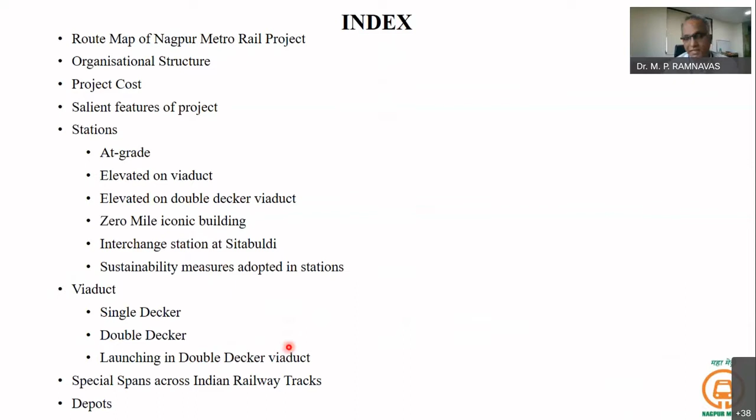I'll be talking on an overview of Nagpur Metro Rail Project, and I'll be taking you through the route map, the organizational structure which we are having, salient features, the stations, types, numbers, etc., the viaduct types, then launching of some of the special structures and the special spans across Indian railway tracks.

We can see our map. We are having two corridors, approximately 19 kilometers, north-south and east-west. In the north-south corridor, the southernmost portion is from Khapri to New Airport and Airport. At Khapri, New Airport, and one more station, Airport South, we are having an at-grade section, where the track is laid on the ground. Once we reach Wardha Road near the airport, we'll be going on an elevated viaduct, and thereafter it is completely elevated viaduct on the north-south corridor as well as on the east-west corridor.

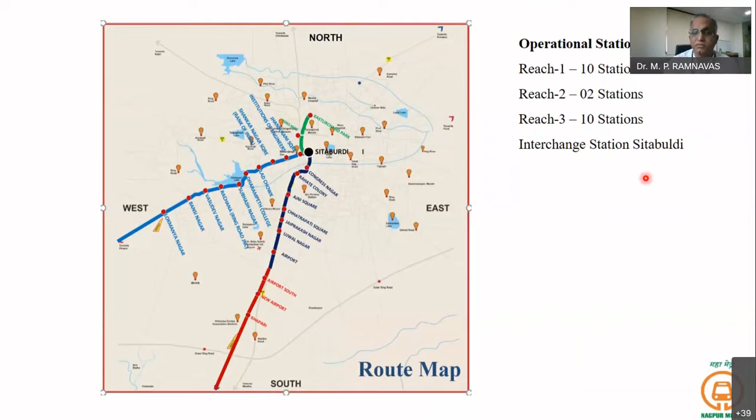Presently, as on date, we have 22 stations operational and about 25 kilometers running. We are running the trains, and we'll be getting approval from the Commissioner of Metro Rail Safety for 8 more stations in the coming days, for which the inspection is already over.

Our organization structure of Maha Metro, for the Nagpur Metro Rail Project, we are having a managing director, then our director projects, who is in charge of all civil engineering matters, director rolling stock and operations, who is mostly in charge of systems and rolling stock, and director finance. Under director projects, we have different units: planning, design, procurement, and various reaches of site execution - reach 1, reach 2, reach 3 - and there is an exclusive unit for the track. I'm looking after the design portfolio.

For the project organization, we have appointed one general consultant, which is a consortium of Systra, AECOM, Egis Rail, and RITES. We have appointed detailed design consultants like L&T Infrastructure, Enia Architects, Shirish Patel Associates, Tandem Consultants, STUP Consultants. Similarly, contractors are Nagarjuna Construction Company, Afcons Infrastructure, ITD Cementation - various contractors are working for our project.

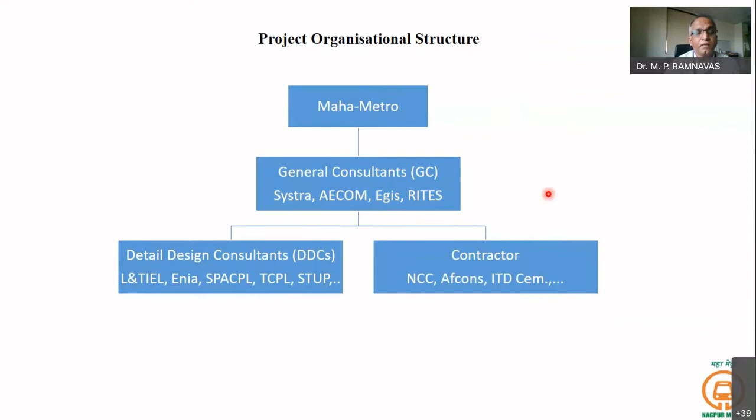Overall cost of the project is 8,680 crores. Viaduct will be around 40-45 crore per kilometer. Stations also range around an average of 40-45 crores per station. Double-decker stations will be 50-60 crores, and the double-decker viaduct portion will be around 85-90 crore cost, which I'll be detailing further. That is double-decker - we are having a national highway also carried on the metro pillars.

Salient features of the project: we are having, as I already explained on the map, 20 kilometers and 17 stations plus one interchange station on the north-south corridor. The interchange station has two sets of platforms, one for the north-south corridor and one for the east-west corridor. So exclusively on the east-west corridor, we have another 19 stations plus this interchange station. Then at Sitabuldi interchange station, we have a place, a busy junction called Munje Chowk, where we have a special Vierendeel type structure.

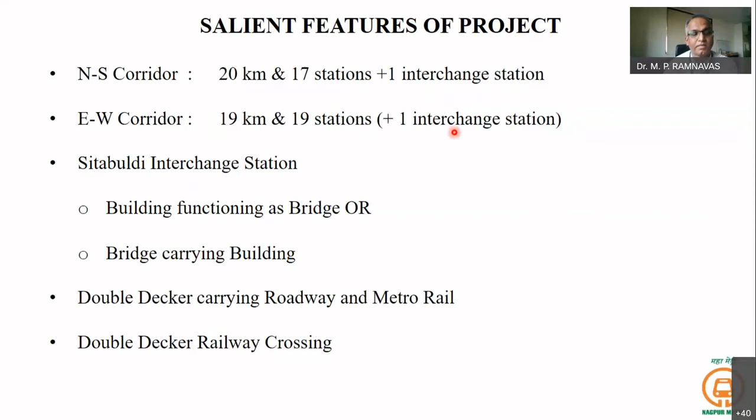So it is something like a building that itself is functioning as a bridge between the viaduct ends, or it can be a bridge where the building is also carried on it. And we are having a double-decker structure carrying highway and metro rail. There is also one double-decker which is crossing the Indian Railway tracks at one location called Gaddi Godam.

Station architecture is generally based on three themes, the three T's: tiger, teak, and tribes, and also aqua bodies. Modern interior finishes are used, and in some places artwork depicting the history of the region is also considered in the architectural design, along with differently-abled friendly design for barrier-free movement, with ramps, tactiles, etc.

For security, environmental design principles are used to reduce dead ends, corners, and dark areas in the station design. Biodigesters are provided for eco-friendly disposal of human waste, and solar panels are provided on the station roof to tap natural renewable energy. We also have rainwater harvesting, and we are aiming for and getting IGBC MRTS platinum rating for all the stations.

The main components of the station, considering an elevated station, include an entry exit structure where people can enter into the metro station. Thereafter, there will be a concourse where passengers enter through the paid area, crossing the automatic fare collection gates. This concourse is ideally kept below the platforms, and from the concourse to the platform we have lifts, staircases, and escalators.

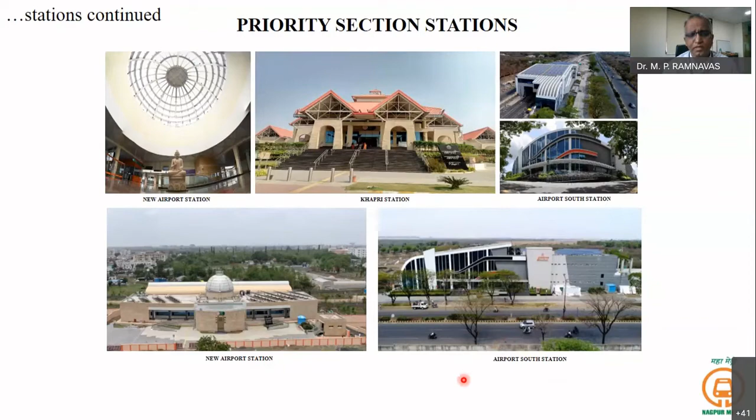There are many other stations in reach one, the southern quadrant or southern arm of the project. We have a station near the international airport, and Ajni Square, Jayaprakash Nagar, Rahate Colony, each one having a different type of architecture.

Coming to one station called Congress Nagar, at the road level plan, we have the entry exit structure on the left hand side of the alignment as well as the right hand side, with the main station box coming here. Ideally we should have got land for the entry exit structure just opposite to the station box at these locations, but that rarely happens. So wherever we get the land - in this case from Indian Railways, since there is an Ajni railway station nearby - we use it, giving us connectivity also to the Indian Railways Ajni railway station. This metro station is named Congress Nagar station.

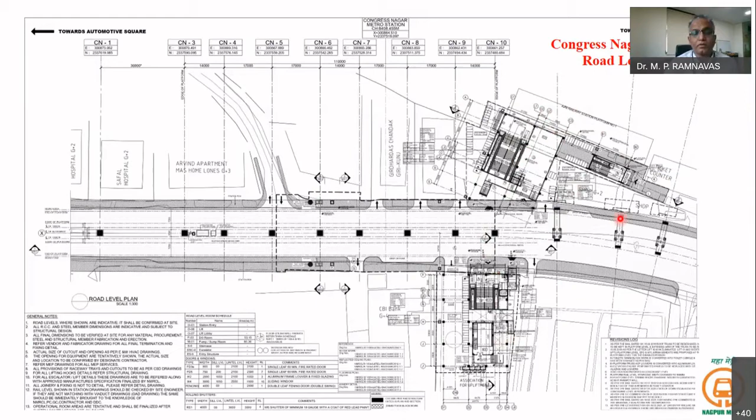From the entry exit structure, we reach the concourse level, with both entry exit structures reaching here. There will be a concourse unpaid area, then the AFC gates, and passing through that one reaches the concourse paid area. From that paid area, through escalators, stairs, and lifts, one goes to the platform - this is one side platform, this is the other side platform. This is the general layout of a station.

For architecture as well as structural requirement reasons, we have different types of roof structures, usually made of steel in most stations. This is the airport station, where we have a concourse at this level. In this particular station, the concourse is independent of the viaduct pier - the viaduct over which the trains run, with its own viaduct piers.

In this case, the concourse is supported on two rows of piers on the edges of the road, and the roof is supported basically on that, with an intermediate support on the platform, which ultimately transfers the load through the pier arm to the pier. But the main load supporting member is the concourse.

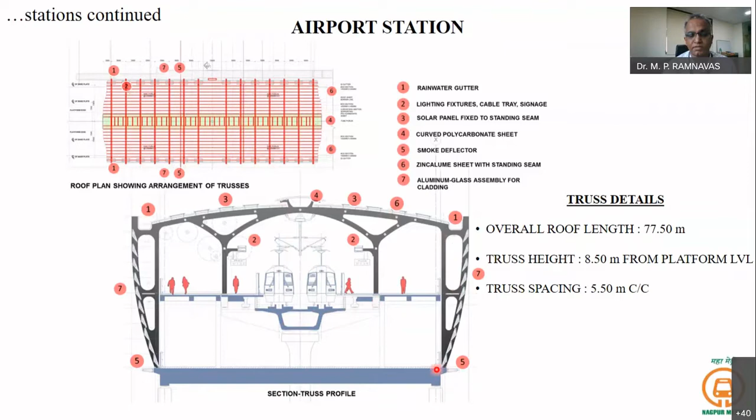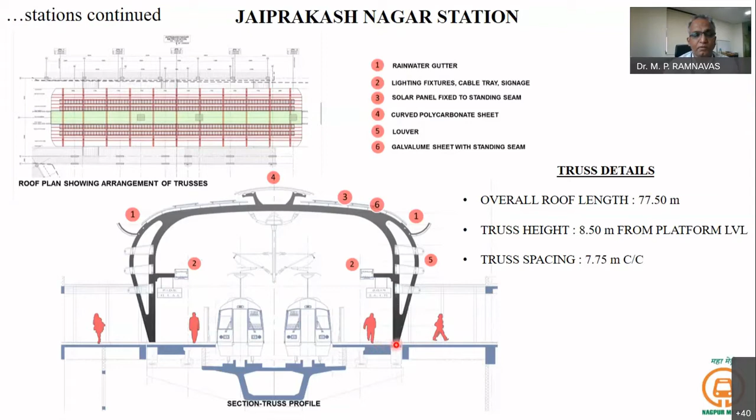The speciality of this type of arrangement is that even when the station work is not completed, if the land is not available for taking up the construction - which usually happens in urban infrastructure, since land is not available when we need it - sometimes we get delayed possession of the land. In that case, we can complete the viaduct along the metro alignment and the platforms as well as the station roof, and commission the track without commissioning the station. So there won't be any hindrance to the train operation even when that particular station is not commissioned, and we can complete the construction of that station at a later date and give entry to the platform without any hindrance to the metro train running.

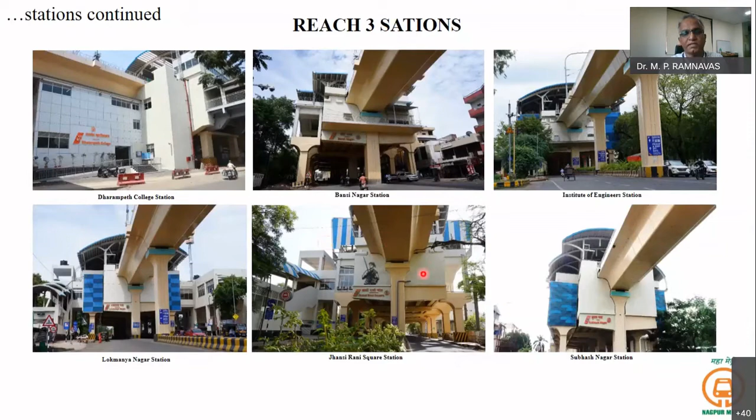This is another station where a different type of roof arrangement is there, similar to the one which we have seen at the airport, where it is supported on the concourse on corbels. And these are other stations in Reach 3, where the theme is aqua, maybe the architecture type we can say is contemporary. There are different types of roofs.

And this is one iconic station at Zero Mile. I think all civil engineers must be knowing this. Zero Mile is the point where the Great Trigonometrical Survey, when they started surveying the country, marked the zero at a location at Nagpur. This station is very near to that point, so it is named Zero Mile. Later it was renamed Zero Mile Freedom Park as per the 75th year of independence, and a small park is also constructed very near to that, which we will be seeing in subsequent slides.

At the Zero Mile station, we have a total of 20 stories. We have 2 basements for parking, then a ground floor, a mezzanine floor, and a concourse for passengers to come into the station. Thereafter, at the G+3 level, we have the railway line, where the viaduct will be coming from this side and from this side. After that, we have a concrete roof and one more floor for a technical room that we haven't constructed yet. We have constructed up to this roof only so far, and the upward 14 floors have been kept for future expansion, for property development, which usually will be given on a PPP basis - public-private partnership.

So this has got some opening here inside the building, and there is a vierendeel girder coming here also.

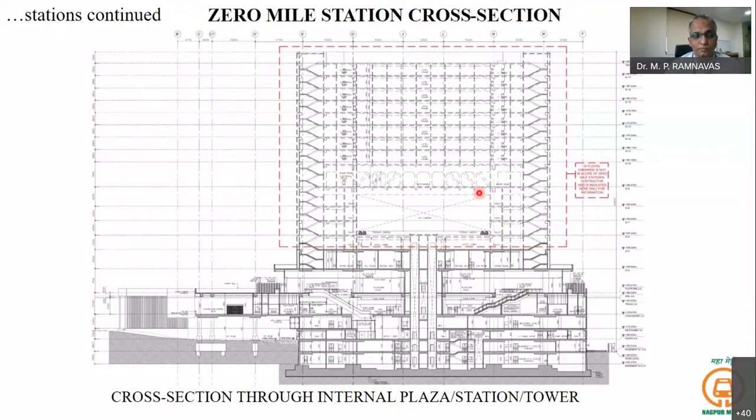For this building, which is proposed to house hotel rooms in the upper floors, lesser vibration levels are needed. The vibration decibels permitted for hotel rooms is 72 VdB. So we conducted a vibration analysis for this structure, and we found that it is more than 85. So we have to bring it down.

For bringing it down, there are many options - different types of rail fixtures, or instead of spring, a rubber pad can also be installed. There are various means, and this is one of the most efficient things which will bring down the vibration VdB level by about 14. So we have introduced this.

That is, a floating track supported on springs. This is the structural slab we are having. On the structural slab, this slab will be cast with a spring inbuilt - a space will be provided for the spring, and the spring will be connected later on to that. This floating slab will be literally floating on these springs, and the track will be laid on that. So naturally there will be a little more deflection than the normal track, so we have done all this analysis to ensure that it is within limit.

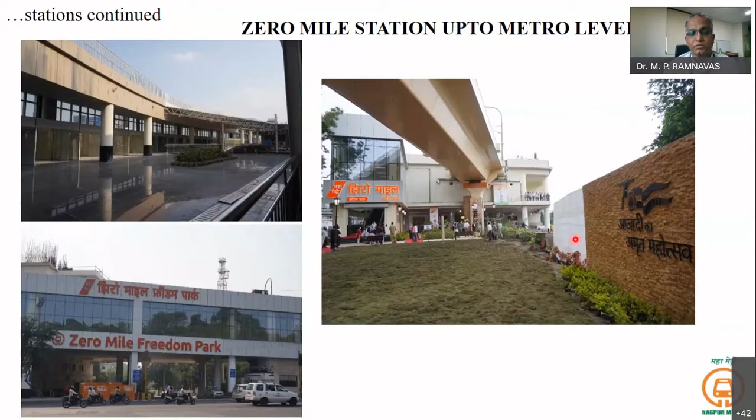About 40 meters by 21 meters, we are having 4 corners supporting the Vierendeel structure. This is the street level. Then the upper level, that is the concourse level for the north-south platform. Over that, on the Vierendeel girder, we are having the track.

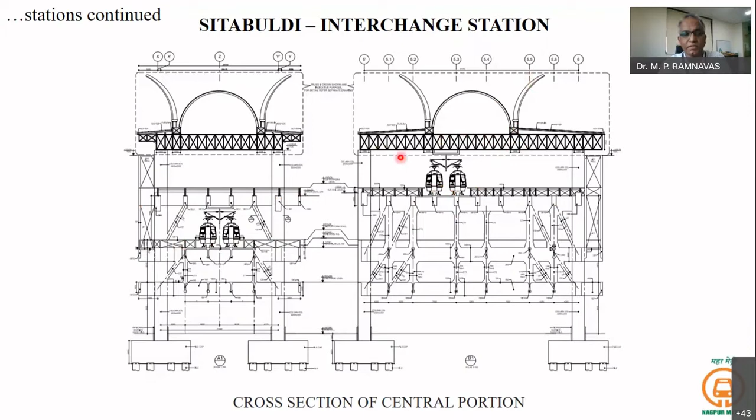Then again, the Vierendeel structure is going up and closed at this level. At that level, on the east-west side, we are having the track for the east-west corridor. Over that, we have provided a steel roof, with some ornamental finishes also proposed, which is yet to be taken up. But with the roof and all other facilities, the station is commissioned.

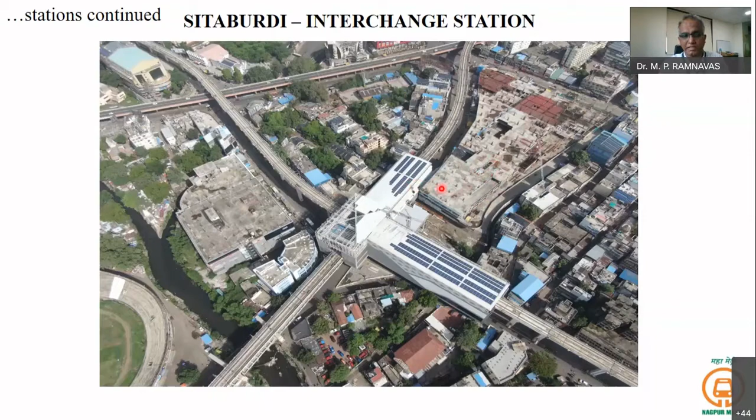And here a mall is coming up, a private mall, and we are giving connectivity to the mall. So passengers can exit directly from the stations towards the mall, or mall customers, after their shopping, can come into the station through access facilities which we'll be providing at the interface.

We have adopted sustainability measures in the stations like rainwater harvesting, biodigesters, etc. So even for the station building, as well as from the viaduct, we are collecting the rainwater, and that will be taken through pipes, through the piers, to the rainwater harvesting pits. That way we are recharging the groundwater.

And we are having biodigesters, a technology patented by the Defence Research and Development Establishment under DRDO. It has the advantage of no energy requirement and zero sludge generation. It uses anaerobic bacteria, an anaerobic microbial inoculum, which is the name of the bacteria used. Once it is charged, it will keep on working without any hindrance.

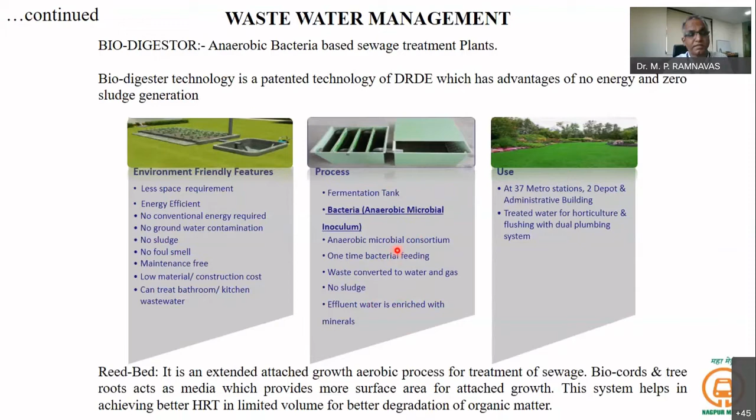We are having the biodigester tank, and after the treatment, it will come onto a reed bed, where the roots will be present. This will further improve the quality of the water. Then filtration through a rapid sand filter, and disinfection is also done. Thereafter, it will connect to the collection sump, and be reused again for flushing toilets or for horticulture wherever we are having landscaping.

So we are having a dual plumbing system in our station buildings, to reuse the treated water as well as for fresh water supply.

And this is the installed facility of the biodigester tank. This is an FRP tank, 5 kiloliter or 10 kiloliter, like that.

The FRP tank is embedded in the ground, and the water, after treatment, comes to the reed bed. There is some plantation here and below, with diffuser pipes inside, and that water will come out and be taken to the rapid sand filter and further disinfection, etc., for storage.

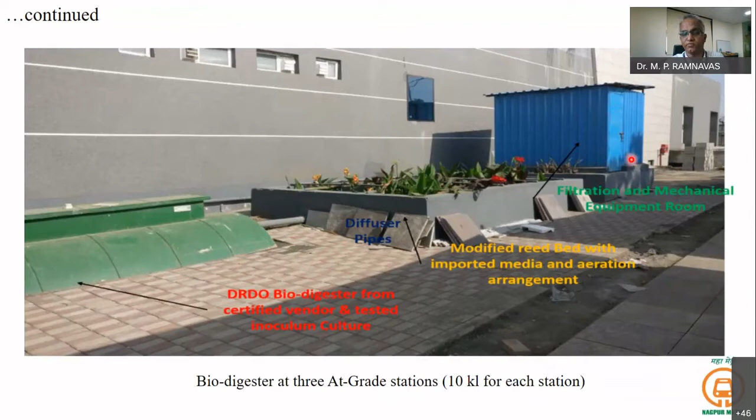This is the FRP tank, which is about 2 meters in diameter and 3.5 meters in length. This one is for 5 kiloliters, and for the other 10 kiloliter tank, the size will increase, with a lot of baffle walls inside to increase the flow time.

So again, a schematic diagram for that. Clear water will be coming from the underground water tank. It will go up and come for urinals, etc. And the sewage will be coming to the biodigester. After final treatment, it will go back to this treated effluent tank.

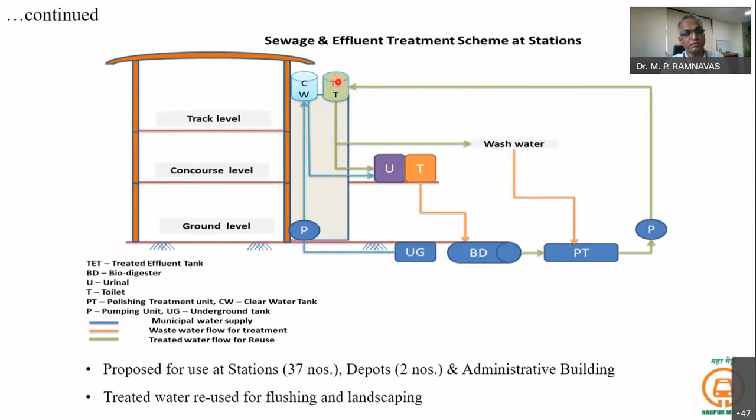And construction waste management also, we are taking all care for that. Excess soil generated is reused for landscaping or backfilling. Garbage, recyclable waste, biodegradable waste, and hazardous waste, it is divided and accordingly disposed with the scrap vendors, according to the type of waste which we are having.

And the sewage generated, even in our depots, all buildings, even our administrative Metro Bhavan building, we are having biodigesters installed for treatment of the sewage. And construction and demolition waste is stored in designated locations for further disposal. That is how it is being done.

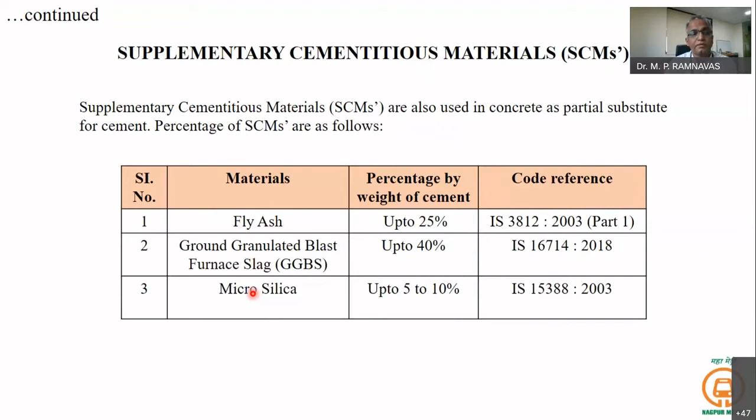Supplementary cementitious materials are used in concrete - fly ash, ground granulated blast furnace slag, or microsilica - according to the proportion. Generally for PSC structures, we are not using any of these things, to avoid lesser hardening of the concrete. And we are also tapping solar energy.

Our phase 1 project, which is now getting completed, the requirement will be 30 million units per year. So our aim is to have 2/3, that is 65% of the total energy, including traction requirement, to be met by solar - that is 20 million units - once we install 14 megawatt peak equivalent of solar panels. But due to some land issues, we are yet to reach that level, so it is in the intermediate stage now.

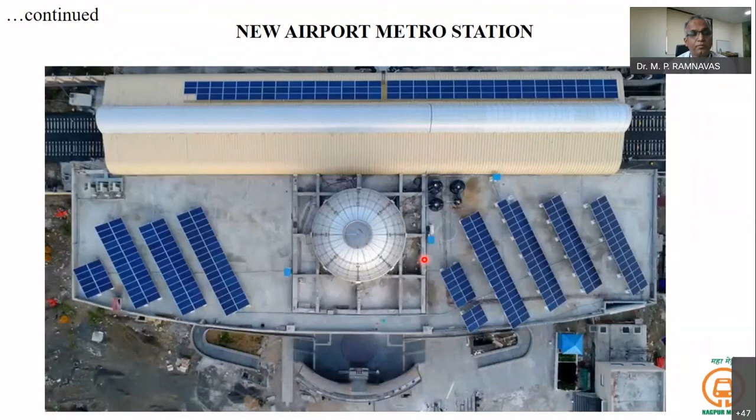Now solar panels we have installed on the airport metro station and airport south station, which we can see on the roof. New airport station, Khapri metro station, wherever the slope is compatible for solar panel installation, we have installed that.

And for the air pollution control in the construction phase, water sprinkling is being done. Dust collector in the hopper we are keeping by covering it with cloth. Then bag filter is used wherever cement is brought through the truck and is filled into the silo.

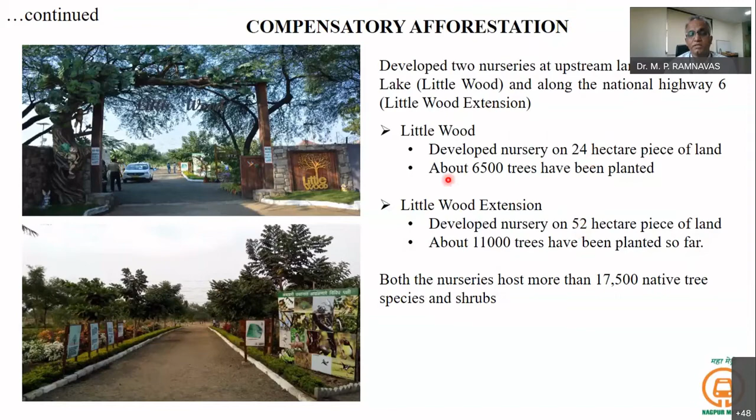And conveyor belt is also provided with cover at the batching plant location. Water sprinkling is done, physical barriers are provided wherever required. We are also doing afforestation for compensatory purpose. We have developed 2 areas - 24 hectare and 52 hectare pieces of land which we got - and 6,500 and 11,000 number of trees have already been planted so far.

Now coming to the viaduct, which is the backbone of the metro system. We generally adopt a PSC box type superstructure, except in obligatory locations where we are having steel I-girders as composite structure, or precast concrete I-girders, or any special railway crossing, where we have a different type of structure. And for the PSC box type, we are using precast segmental construction through launching girders - these are launched. We'll be seeing those things in the subsequent slides.

And we generally adopted 1,200 dia pile foundation. At some locations where shallower depth gives very good safe bearing capacity, we have gone for open foundations. Generally all piers are single column, except a few locations where it is portal. And we are having some double decker stretches - about 3.1 kilometers in reach one, that is the southern part of the project, and the northern part reach to Kamptee Road - about 5.5 kilometers of double decker carrying 4-lane NH at the bottom level and two-line metro rail at the top.

In the double decker stretches, below the platform we need to have a level where the concourse is provided for passengers to assemble and proceed to the respective platforms, or to assemble from the platform and decide which side they have to go off the road. In double decker stretches, this position where we are supposed to keep the concourse is already occupied by the national highway flyover. So we are having a split concourse on the roadside structure - the side structures, as we can say.

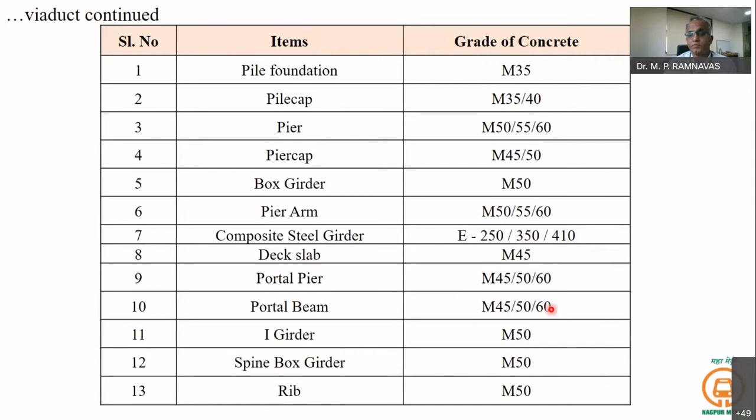The segmental box girder used generally in all other metro projects till recently is a box girder which is segmental. All these segments are cast, and then finally through the launching girder it is launched and stressed. After that, another precast element for the parapet is brought from the casting yard, and this is attached with the deck slab of the piers, this box girder, through stitch concreting on both sides. This is how it is generally done, starting from Delhi Metro and even Bangalore Metro or other metros.

So we have made some change in this. We have made our cross section with the deck slab and the box girder like this. And the parapet, instead of having a separate parapet, we have made the parapet a smaller one, integral with the box girder, cast integral with the box segments.

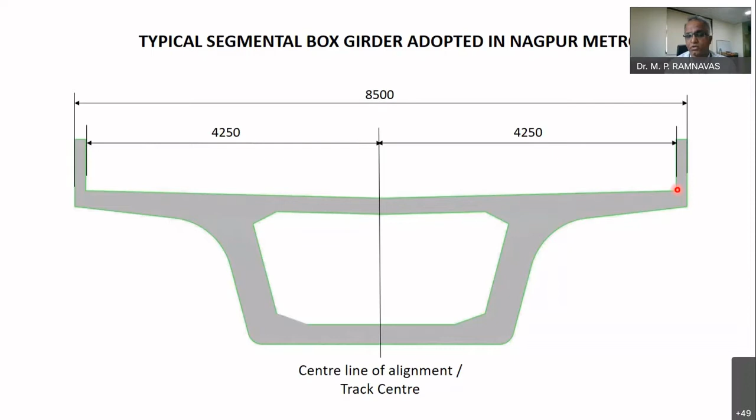So with that, the additional effort of casting a parapet and bringing it to site and launching it above the running roadway traffic is avoided, which has enhanced the safety aspects as well as the cost and time aspects. This was possible, and with this we could make the width of our viaduct 8.5 meters instead of 9.95 generally used with the other earlier conventional arrangement.

By integrating this, we have got reduced girder weight, superimposed dead load is also reduced, erection of precast is avoided, there is no stitching activity, resulting in reduction in time and cost of construction.

On dimensional aspects, generally for the conventional box girder arrangement, the inner distance between two tracks will be 4.15 to 4.25, and in the U girder it is still more. We have adopted 4.1. Then the height we have reduced to 0.7 meters compared to 1.2 elsewhere.

Another feature is in the operational aspect of the trains. In case of an emergency, when a train is required to be stopped in between and passengers need to be evacuated, what was generally followed earlier is side evacuation. The side doors of the train will open and people will come out of the train, and they need a walkway on the sides. Along the walkway, they will walk down to the nearest station. This is how it is being done generally.

But in our case, we are having front and rear evacuation. If a train is in any case held up between stations on a viaduct, then the front and rear doors will be open, and coach by coach people will be evacuated. They will come out at the end of the train or at the front of the train, and they will walk along the viaduct.

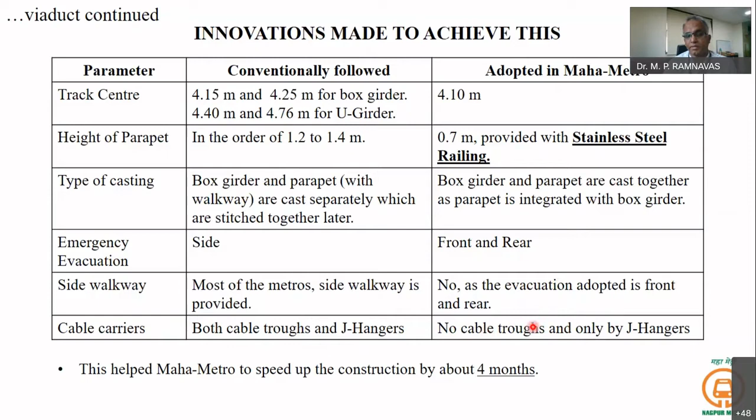We have also made it more compact by avoiding cable troughs and keeping all the cables on J hangers on the parapets. With that, for a typical 25-meter span, we could save some 30 cubic meters of concrete in the cross-sectional dimension of the superstructure, which ultimately reduces the dead weight.

It will also help in reducing the cost of the substructure and foundations. So overall cost reduction due to this compactness and integral parapet casting is estimated to save about 100 crores in the total project.

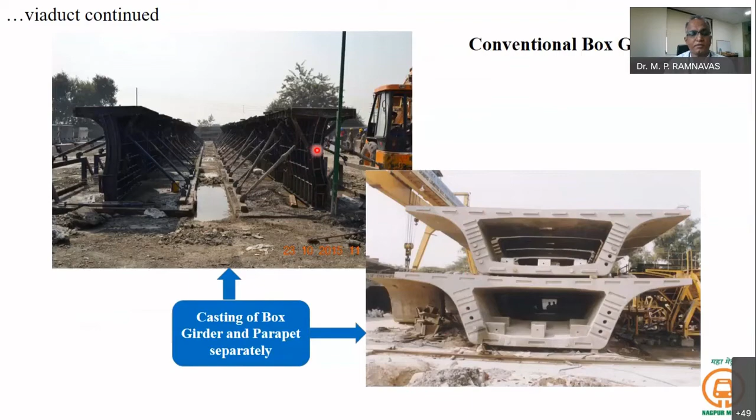This is how the conventional box girder segment with the deck slab is cast, and this is the parapet casting, including the shuttering only. I'm having a photograph — now it is not being used in our project. Whereas in our case, the box girder section is cast along with the parapet.

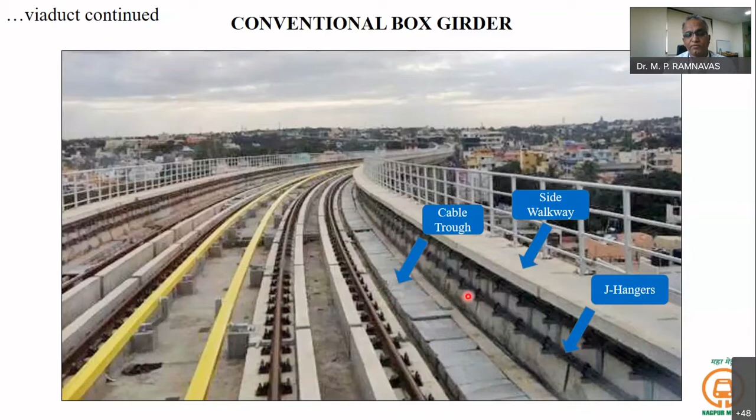What we have changed is this: cable trough is not provided, this parapet has no walkway required, and this J hangers we made in one more layer. So instead of cable trough, all the cables are carried on the J hangers at the sides of the parapet, which can be seen here.

We are having overhead traction, overhead portals for the traction. This is made of tubular construction, which is first of its kind in India. It is economical compared to the normal type of latticed portal or whatever we generally use on Indian Railways or elsewhere.

Here we don't have a side walkway, whereas with the parapet we are having stainless steel handrails, and here we are having all the cables taken on the side of the parapet.

Now coming to the geology and foundation aspect of the project, we are having 4 reaches. In reach 1, the southern part, we are having hard basaltic rock with depth varying from 15 to 25 meters, and at some places weathered rock at shallow depth. So we went for open foundation in very few locations, generally pile foundation with 750 ton capacity.

In the northern part, we are having highly weathered granitic gneiss along with schist, which is very poor kind of soil. So we cannot have end bearing; we have gone for friction piles with depth ranging from 20 to 30 meters, with capacity restricted to 650 ton.

In the western part, which we call reach 3, we are having basalt rock, so more open foundations are provided there, and at some locations we have gone for pile foundation also. In reach 4, we have reasonably shallow depth, maybe hard rock, so up to 750 ton we have gone with friction cum end bearing piles.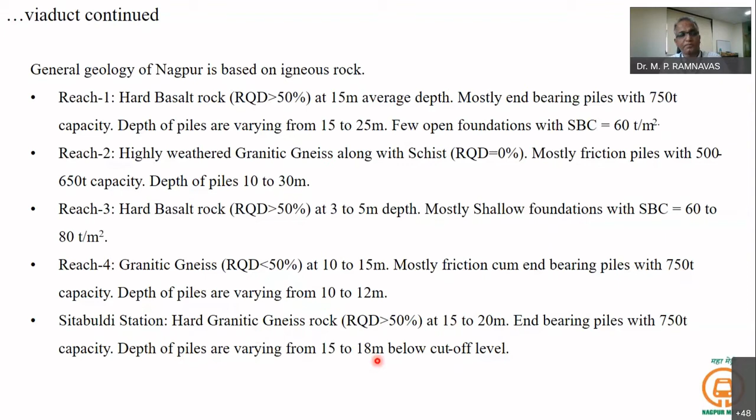Initial vertical load test is done with cantilever loading or with reaction anchors. Cantilever loading, especially when we want to do it on road, may need more time, and there is also some safety hazard. So reaction anchor type is more preferred nowadays.

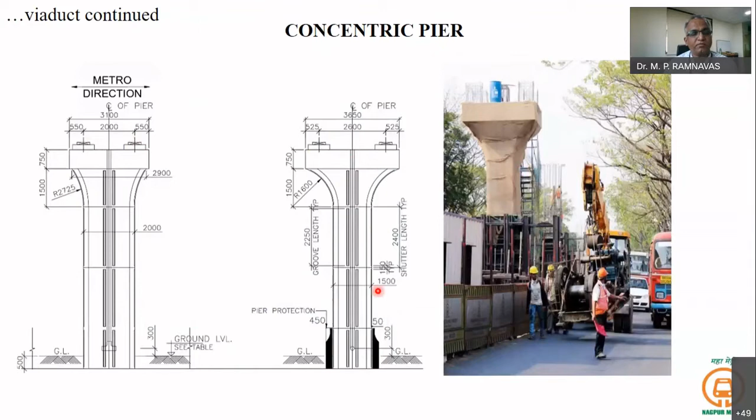Typical elevation of the concentric pier for the single decker level: we are having transverse spacing of the bearing as 2.6 meters and longitudinal spacing between bearings for 2 spans as 2 meters. This is approximately 1.5 by 2 meter pier size, cast in situ pier.

At very few locations we are having portals. This is near Airport South.

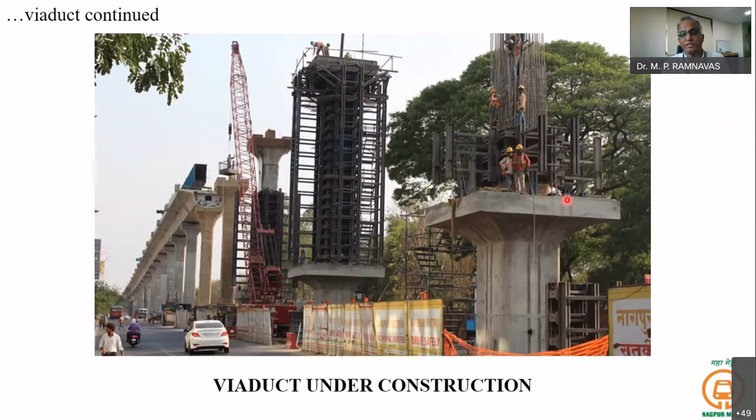And these are some of the under construction photographs from site. Here the single decker viaduct superstructure and the launching girder can be seen. And here we are having the ramp portion for the double decker portion. So these pier caps are for the NH level flyover, which we'll be seeing further, and the metro level will be at this height.

So for the launching of the superstructure, generally we use launching girder, which is little above 2 span length. The maximum span used so far is 37 meters, mostly restricted to 34 meters.

So this will have one front support, middle support, rear support, and rear trolley. These two spans are already erected, so this is a new span going to be erected. On the erected span, it is already auto-launched, spanning between two other piers where the girder is to be erected. The front support will be on the pier standing alone, the middle support will be on the pier where the superstructure is already erected, and there will be a rear support and a rear trolley.

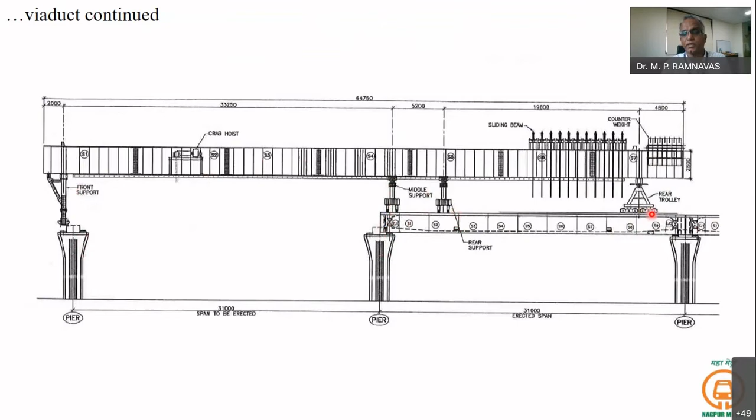These are the sliding beams which will be taken here, and it will be lifting the segments brought from the casting yard one by one, hanging them like this. Once all the segments have reached, they will be aligned properly. Then temporary pre-stressing will be done between each pair of two segments. Before that, epoxy will be smeared on the joints, and temporary pre-stressing will be done on top and bottom, so the epoxy gets squeezed and fills the entire contact area of the two segments, where we are having some shear keys also.

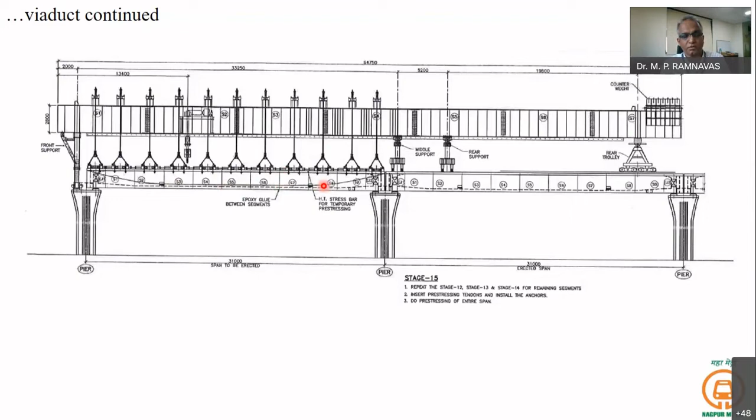All these segments are match cast at the casting yard, so as to have proper housing of the interfaces. After that, pre-stressing strands and cables will be threaded into the ducts left during casting, then stressed and grouted. The cycle requires about 5 days for one span on average.

As told earlier, in the southern part we have about 3.1 kilometers with 3 stations in the double-decker look, where a highway is also being carried on the metro piers, and here again 5.5 kilometers.

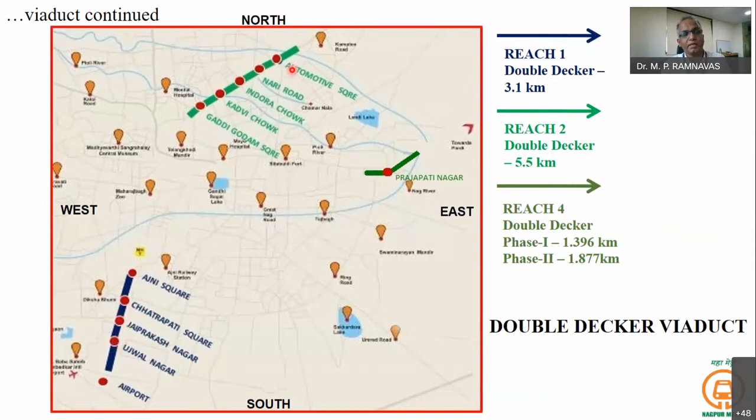The challenge of having two types of loading is that many load combinations must be considered in the design. For live load we consider IRC Class A, which is 4-lane loading, each with 2-lane up and down sections, and also 70R wheeled loading. Live load of metro is 16-ton loading, considering braking and tractive effort, metro rail LWR forces, and centrifugal forces wherever a curve is coming, with all combinations stipulated in IRC as well as IRS.

In this double-decker location, for reach one, we have restricted our pile capacity to 600 tons, and SBC maximum considered is 50. Even if it was more than 50, we considered only 50 to be on the conservative side.

For the superstructure, we have 3 locations where the NH flyover is carried on metro piers. In 2 locations metro is constructing for NH, and in 1 location NH is constructing the flyover. So our metro pier superstructure is the metro superstructure, and also the pier starting from the highway flyover level is constructed by metro. That comes in the reach 4 Prajapati area.

Wherever complete construction is done by us, the NH flyover is designed as a spine and rib arrangement. In that location, as told earlier, concourses will be there, considered as a split concourse on both sides and connected by a link bridge.

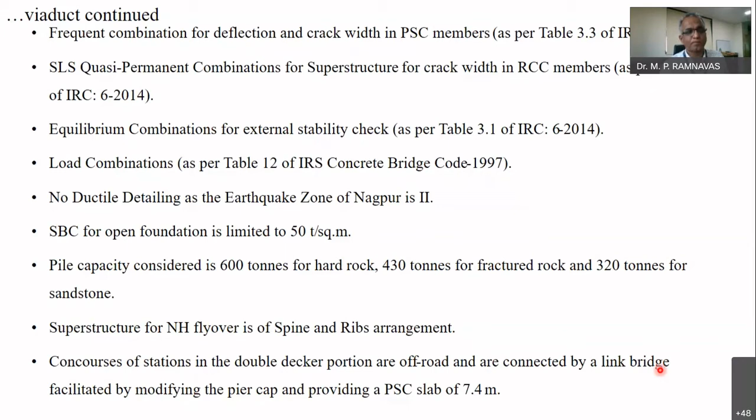This is a typical span of the double-decker flyover where the pier will be there, and the pier dimension reduces after the highway level further to the metro level. At highway level, we have the flyover with the spine about 6.25 meters top width.

The spine is precast, segmental construction, and the ribs are T sections, also precast, which are joined and stitched later and pre-stressed.

The dimensions of the pier from street level to highway level will be larger, then from highway level to metro level will be smaller, taking only the metro loading.

Since the height is more here, we have considered the UIC provision for track geometry also. The lateral deflections are limited and checked to have no impact on the railway alignment, as provided in UIC 776.3.

There is some problem, the Microsoft PowerPoint is not responding. Okay, it's moved now, I think. Yeah, it's okay now, I'll continue.

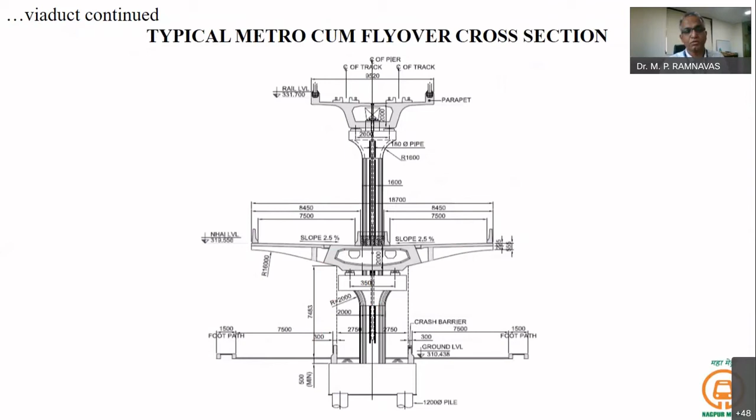By providing the spine and rib type of superstructure, we have more vertical clearance available here, so the road level is raised to the minimum.

In this case, which is followed by the construction taken up by National Highway in the eastern side, Prajapati, they have a pier arm, so the vertical clearance is to be maintained at 5.5 meters, and they have two independent box girders. The metro pier will start from this level going up, and metro box girders are installed by us.

This is another type of section used in the other part, which is not basically constructed by us except this portion.

This shows the cross-sectional dimension wherever we don't have a metro station. For the non-station portion, the bottom dimension is 2 by 2.5 meters and the top is 1.5 by 2 meters. Where the station is there, the station pier arm holds the platform, and in some cases the roof also.

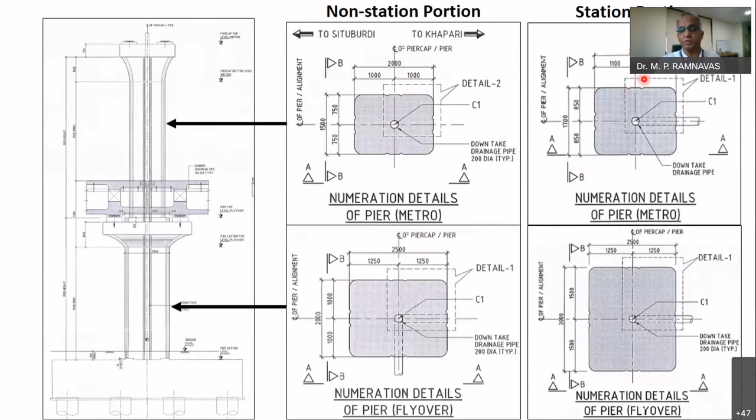In such a case, the pier column dimension is increased from 1.5 by 2 to 1.7 by 2.2, and the 2 by 2.5 dimension is increased to 3 by 2.5.

One complex thing in the double-decker type structure is that a station requires an interchange to be provided between the two parts of the station, which are on either edge of the road.

From the road level, this is the national highway flyover level pier cap where the spine will be kept. Then we have kept an extended pier arm and another component. These are all integrally cast but in different stages, along the direction of the metro alignment.

Then we will have this pier arm, and the top slab will be kept spanning across it, creating a tunnel-like space once completed, which is part of the link bridge. From one side of the station, we provide a link bridge up to this point, then go through, cutting across the metro box girder, to the other side. This is how the interchange happens.

It is not only complex for the design, but for the construction also. So in phase 2, if such a situation arises, we will try to avoid it. It's not that easy, but this is how it is done.

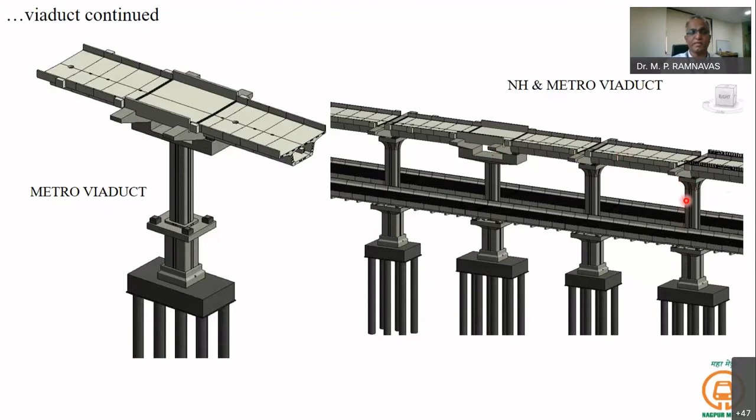This is a typical station pier arm, not an interchange location. This is again a typical spine and rib, with the precast cantilever arm acting as a rib. This is the spine cross section, and here is the rib.

This is all separated. It is precast, brought to site, erected, and pre-stressed. After that, this will be joined here and here, and pre-stressing stitch concrete will be done from rib to spine and rib to rib, with another rib stitched as well. Thereafter, pre-stressing strands will be provided through this for the entire width, and it will be pre-stressed.

This is from when we started Reach 1, the southern side. From what we learned in Reach 1, we improved the stitch concreting - the precast itself provided a bottom shuttering kind of portion, so no further shuttering was required except a very small metallic strip, making the stitch concreting shuttering simpler.

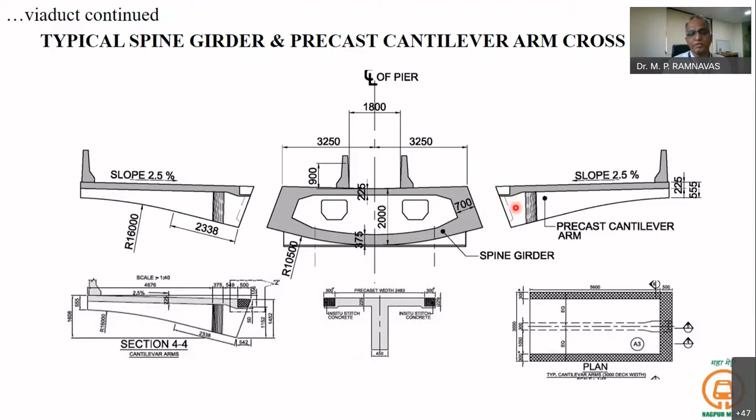This method was provided in the northern part, which was taken up later and is now almost nearing completion. This is how the erection methodology works for a 2-level or double-decker kind of superstructure viaduct.

Here, a separate launching girder is used, which will be auto-launched onto the span where it is to be launched. Through the truck, the spine segments will be brought and hung from the slider beams sliding on the launching girder. Then it will be aligned and stressed.

Once stressing and grouting is over, we will start erection of the metro level girder. For that, instead of taking it from below, since the presence of the spine girder will not permit that, it will be done like a front feeding.

The truck will be brought to the front of the span to be erected, and from there, tilting it 90 degrees - not in the alignment where it is to be erected - it will be brought up. The front leg has 2 legs, and between the legs there is space for this segment, of 3 meter maximum length, to go across.

So it will come through the space between the two legs of the front support, and it will come here and be aligned like this. After all the segments are aligned properly, it will be pre-stressed and grouted. That is how it is completed.

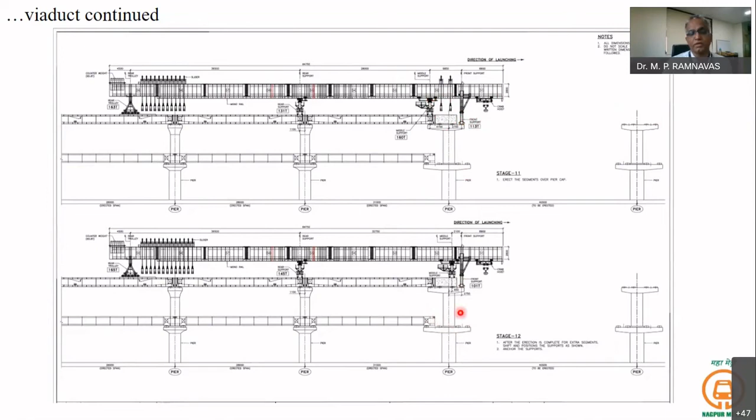In the case of double-decker 2-level superstructure launching, it takes usually an average of 9 days. And this is how the double-decker launching was going on.

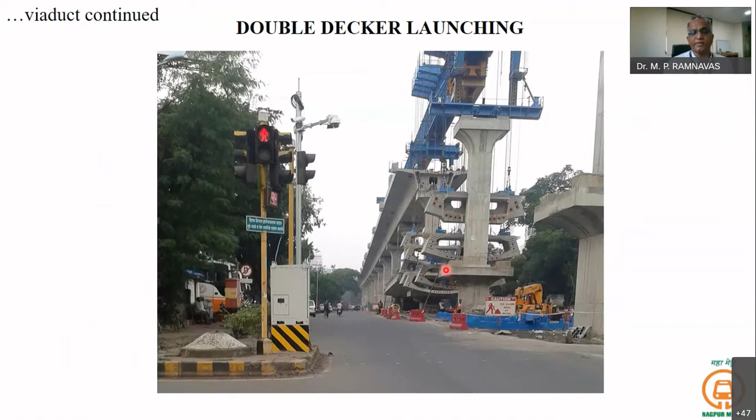The spine segments for the NH level was being lifted up. It was being lifted up here. It is kept hanging.

After that is completed, the metro level segments are being lifted, and it will be kept here, and further it will be stressed. Then the launching girder will move out to the next span, and again spine, NH flyover level and spine, and then metro level box. And this is some photographs showing these activities.

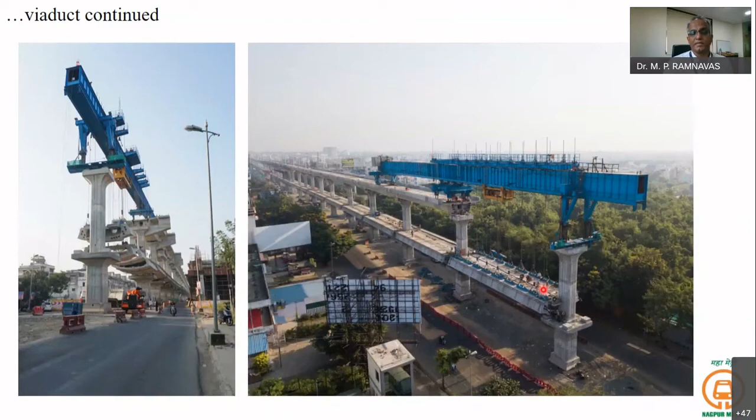This is one spine completed at the NH level. The metro level is going to be taken up. Here, this is the station portion where the double-decker alignment is there.

So we are having the NH level spine here. Ribs are yet to be attached to that. And these are the station piers. At the central pier, we are having the link bridge.

For that, the provision is being made with an extended pier cap and some arrangement for the pier arms. And this pedestal kind of thing on the pier arm is for supporting the platform, for making up the height between rail level and platform.

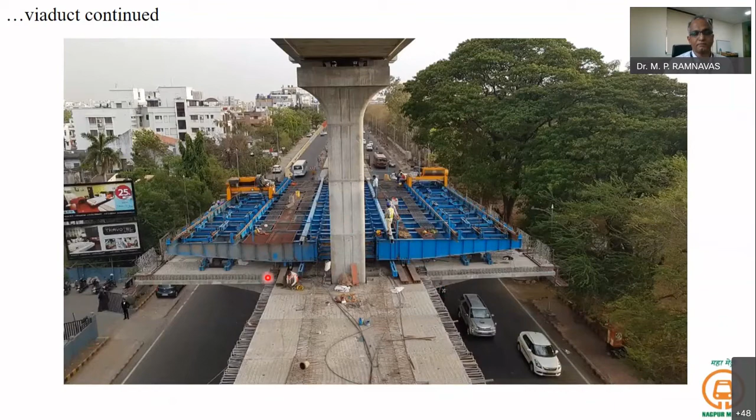And this is how the ribs are being installed. That steel formwork, steel structural assembly will be kept here, and below that each rib will be lifted up, and that will be kept here, and stitch concreting will be done. After that, stressing will be done.

And this is the shuttering required for stitch concreting between two. This is the gap available, and this is the shuttering kept. In this kind of design, we need a very small strip of steel shuttering with this arrangement.

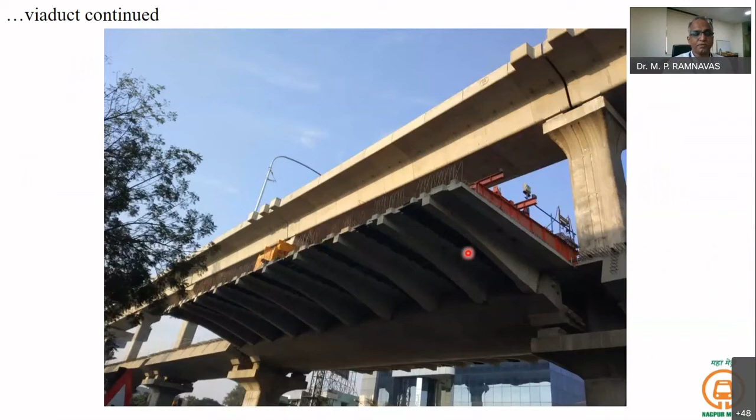This is after erecting the ribs onto the spine, slightly dark in the picture. Other spans it was not completed. This is the final bottom of the spine here and the ribs. This kind of superstructure is available on Mumbai International Airport much earlier.

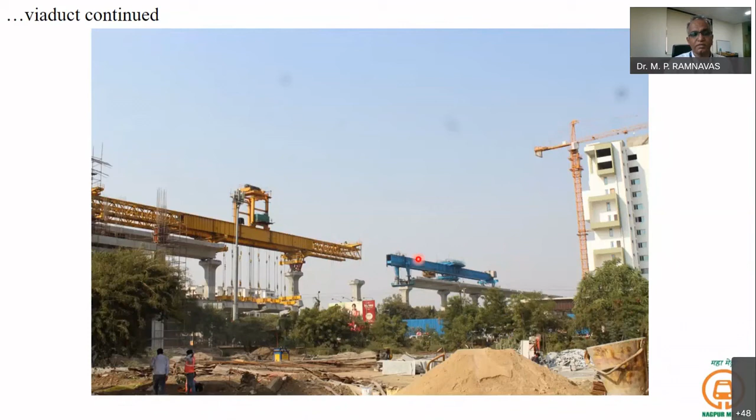And this is again that 2-level launching being done. And to speed up the work, we generally have launching at 2-3 locations with the help of 2-3 launching girders working. So it is coming to a closure here.

This is again Chhatrapati, Jaiprakash Nagar station, where the station can be seen. At metro level, the train is running, and this is the highway level.

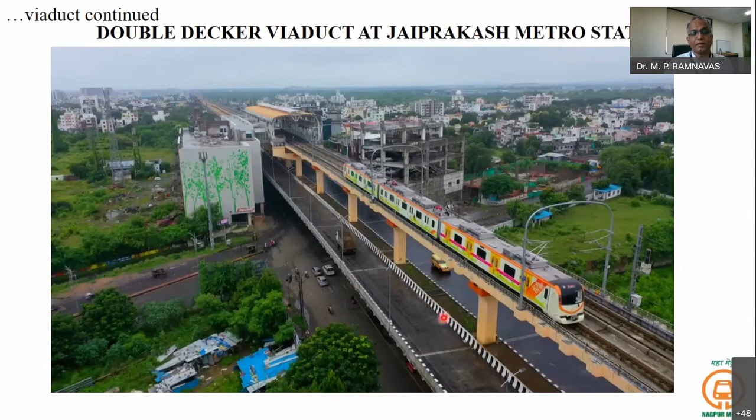Now we are having a few special spans. One is across the railway tracks, basically, where we don't have much control on organizing the pier locations or adjusting the spans. So in this location called Anand Talkies, we are having 5 existing Indian railway tracks, and they have a proposal for 3 more tracks, 2 on one side and 1 more other. So totally we have to give space for 8 tracks, and our alignment is crossing at a skew angle of 52 degrees. The actual crossing, if it had been square, would have been 45 or 50 meters, but because of the larger skew angle, the length of the span required for crossing is close to 100 meters. Finally, we restricted to 97 meters.

So in that location, we are having an integral bridge constructed using the balanced cantilever construction methodology, with a span configuration of 72 plus 97 plus 62.2 meters. The 62.2 span is slightly on a transition curve, with mild curvature also there.

We are having another location where at present we have 2 Indian railway tracks, and they have a proposal for 4 more tracks. So totally 6 tracks we have to accommodate. For that, our crossing is at 18 degrees skew, and we were able to manage it with 80 meters. But there, another feature is that this 80 meter span is part of a double-decker stretch. We have to carry the 4-lane NH at one level, and at the upper level we carry the 2-lane metro tracks.

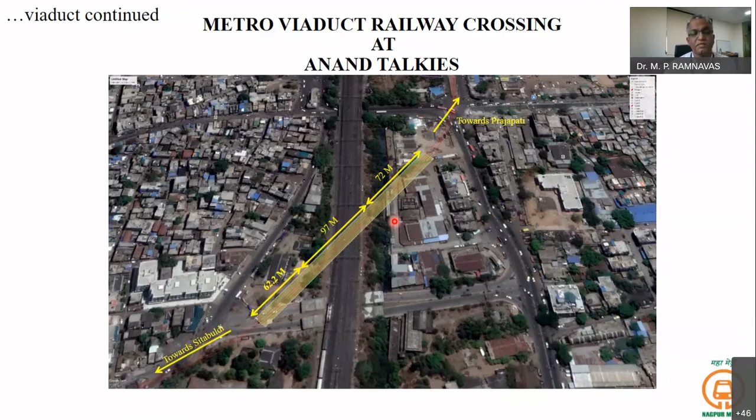Initially we proposed a steel truss also here, but there was no space for fabricating and launching the steel truss. That ultimately made us decide on a concrete bridge with balanced cantilever construction. So this is the longitudinal section, that's 72 meters. This is one pier, then again 97 meters, then 62.2 meters.

And this is the plan. These are the existing 5 tracks in black and the 2 plus 1, 3 tracks in green. This is on a 52-degree skew angle, and this is a typical half portion of the structure. We'll be seeing some more drawings to show the sequence of casting of these things.

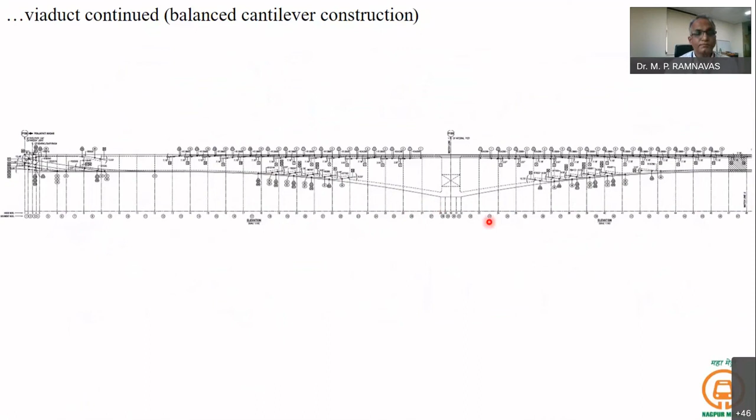Usually the balanced cantilever construction will be taken up starting from the pier. This is a totally 3-span integral bridge, so the middle 2 piers we start with a pier head of 16 meters, that is 8 plus 8. Then using a form traveler, at this railway location, we will cast another 3 meters here, another 3 meters there, which will be balanced. Similarly, on this pier also, 3 meters, 3 meters. Like that, both piers incrementally will be grown with concrete in 3 meter intervals.

So 8 meters plus then 39 meters on this side and 39 meters on the other, that is again 13 segments of 3 meters when we complete. These two will come closer to each other, leaving a gap of 3 meters, and with that 3 meter closing segment, we'll close the span. In between each stage, after each segment casting is over, we will wait for the concrete to harden for 5 days, then do the stressing, then grouting, and the form traveler will be moved to the next segment. So when the work is taken up, for the entire duration of the work, we request the railway, and the railway will impose a speed restriction for the entire duration of the work.

During the movement of the form traveler, that usually happens at midnight. We take a 1.5 hour traffic and power block from Indian Railways for the form traveler to be moved. During movement only, they insist on that block. Once the movement is over, during concreting, we don't take any block - even if a train runs at slower speed, there was no hazard since we had a very reliable system in place.

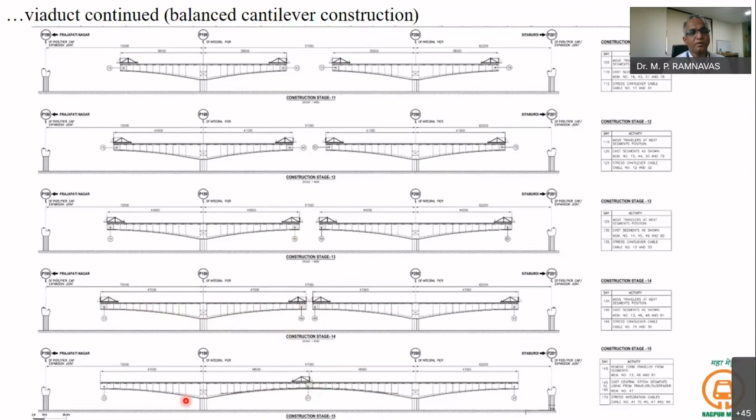Then both ends will have ground supported staging, this side and this side, and in-situ casting of the superstructure will be done here. The superstructure has a depth of 7.25 meters here and 3 meters here, and 3 meters here as well. After that, the final pre-stressing will be done according to the design stages.

This is the form traveler arrangement - this is the pier leg and this is the pier head. This is one form, one set, so half will be here and half will be here. The form traveler should be able to carry the weight of the wet concrete plus all constructional loads for a length of 3 meters and depth varying from 7.25 meters at the start to 3 meters at the end.

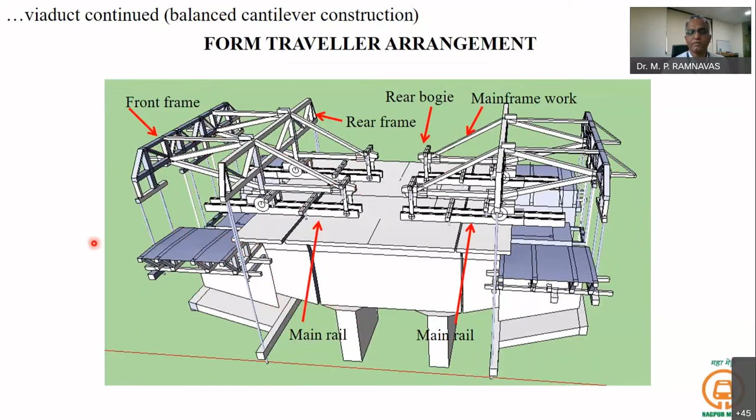This is the load testing - this is only a 3D view, but finally the load testing was also done on this bridge. We are awaiting the Commissioner of Metro Railway Safety sanction for operation of passenger traffic.

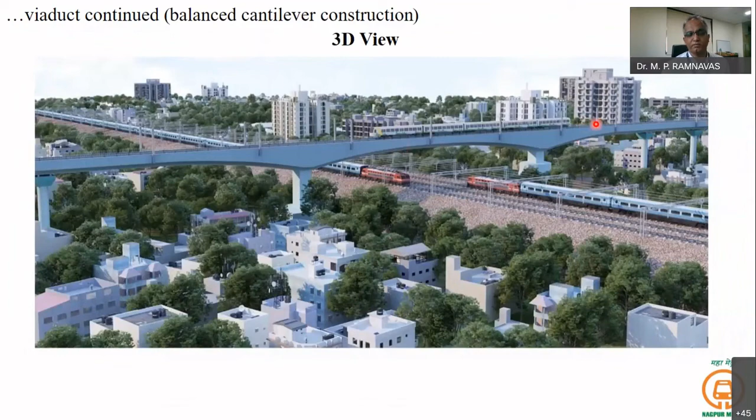This is another location called Gaddigodam, where we have a double-decker railway crossing, part of a 5.5 km long double-decker stretch with a 4-lane NH and 2-lane metro. Here, the NH is already going as a subway below the Indian Railway track.

The Indian Railway track earlier had a plate girder bridge. Later they changed it to a pre-stressed concrete slab, precast segments. So now that slab is available, and this is the plan.

There are two Indian Railway tracks, coming from the northern side towards the city. We have kept a span of 80 meters. We have many obligatory situations - here is a Gurudwara, and we cannot have the pier closer to that, encroaching into their land. Railway always wants the pier kept outside the railway boundary. So on this side we have gone a little away, and on this side railway allowed us to provide it inside the railway boundary.

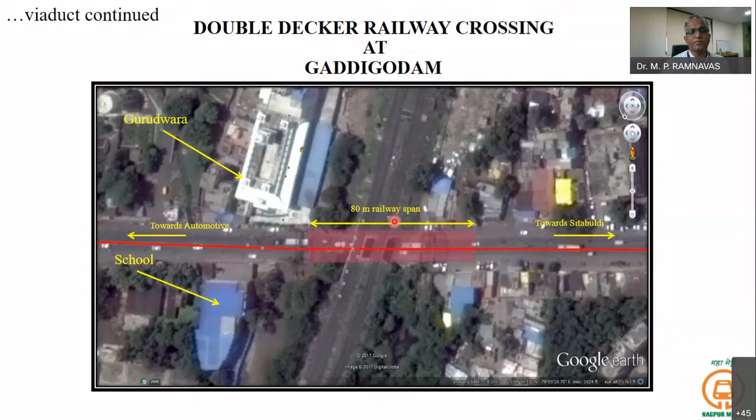At the top level, it was supposed to be a pre-stressed segmental box for the metro to continue, but due to construction sequencing, since this was taking time to complete, we are just completing it now. In a few days everything will be over, including the deck slab casting. So to speed up the work, we couldn't wait for the launching girder here to complete this work, so the launching girder had to be demobilized.

So we converted this span at metro level to steel-concrete composite with steel I-girders and concrete slab, similarly on the other side also. This is on an 18 degree skew with an 80 meter span. NH is at the lower chord level. Here we can see 2 existing tracks and 2+2, 4 proposed future tracks for Indian Railway.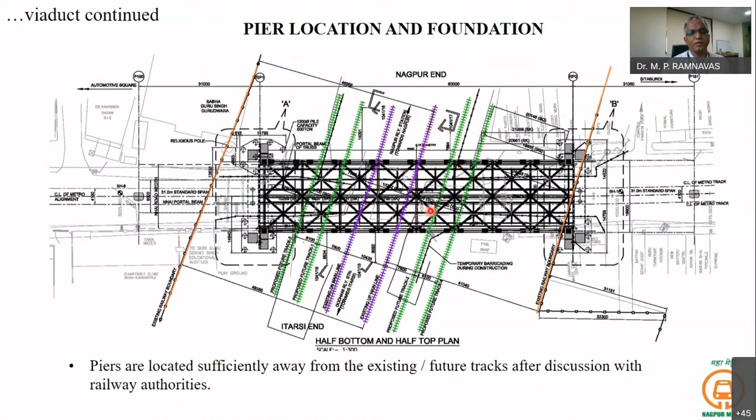This is the portal. This was done to meet some provisions which the railway had in 2017-18, when we were getting this general arrangement drawing approved. They wanted redundancy built into the structure in case an Indian Railway train gets derailed, so that this structure would not cause secondary failure of another bridge.

So in the case of Anand Talkies balance cantilever, we provided a fending wall, an RCC wall designed for whatever force was stipulated by railway, around the pier supporting the balance cantilever. Here in the portal, we introduced one more redundant leg, so that even if this gets crashed or fails, the portal will remain standing without it. That was the redundancy done.

But after one year of issuing that circular, the railway themselves kept it in abeyance, and it has not been followed now. But since our GAD was already approved like this, we are continuing with the same kind of work.

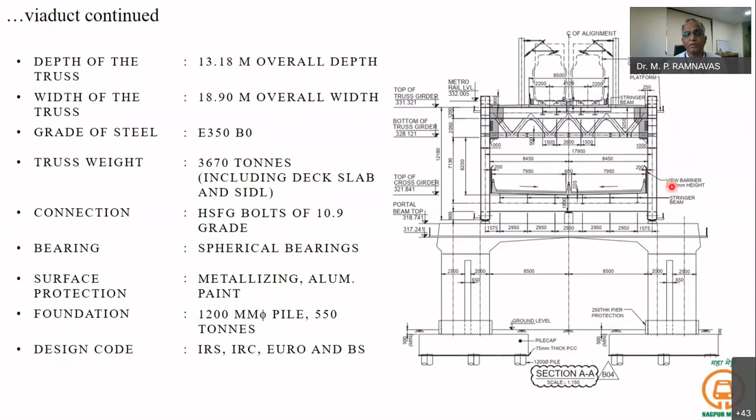The bearing arrangement provided has 4 supports at 4 corners, for this 80 meter span. At all 4 corners we provided vertical bearings, and a pin bearing was provided at one location to take the longitudinal forces, with a longitudinal guide provided on the other side.

At the construction stages, this will be the finished truss. This shows the construction stages after the truss erection, which I'll detail in the coming slides. After the truss is erected, the NH level slab will be done, and after that the metro level slab will be done. That is how the construction stage proceeds.

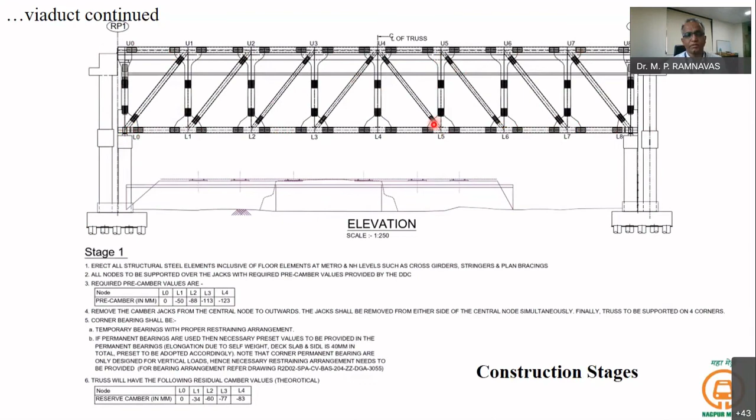Now the launching scheme across the Indian Railway track. Various schemes were studied over many years. Initially we thought of erecting the entire structure at the adjacent span, just before the particular span, needing 18.9 meter width with clearances in straight alignment, so it could be fabricated and erected there, then pushed through nose launching or other means. But the road alignment is not straight, and the nearby shops which we thought of demolishing and acquiring did not happen, so we had to devise another methodology.

Finally, the methodology adopted divided the total 80 meter span, which has 8 panels, into 3 parts. The launching scheme was devised with a lot of temporary supports made of steel tubular columns, and a bridging beam was given. These are the temporary supports.

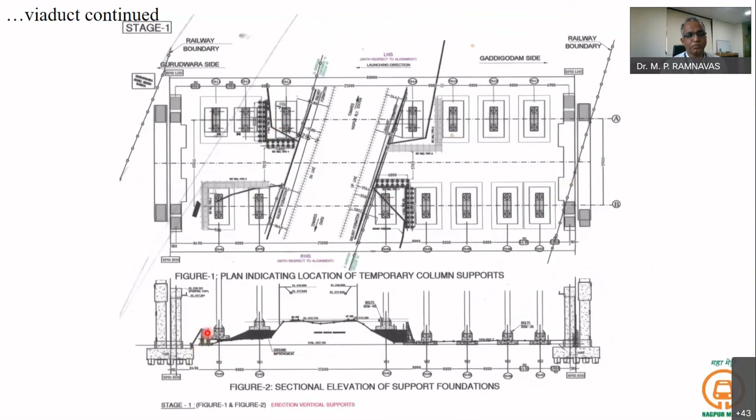That itself was a huge work. You can see the longitudinal section, temporary supports for that, with concreting and even piling, everything was done.

After it reached the proper level, we provided steel built-up girders on both approaches across the railway to be spanned. For that purpose, we took a traffic and power block from the railway, and through crane, those girders were installed and erected here, with planking here and here. It is actually skewed, so this was later made very stiff to avoid unequal deflections between the two lines of the same truss while moving. This was for bridging between the temporary piers on both sides of the Indian Railway track.

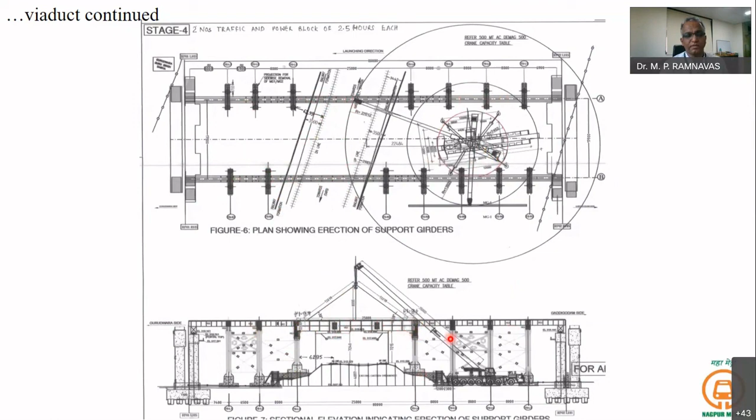So now this is made, and the top was given a proper surface finish.

After that, part 1 is erected on supports, which are placed on jacks to adjust the levels for proper fabrication and connection.

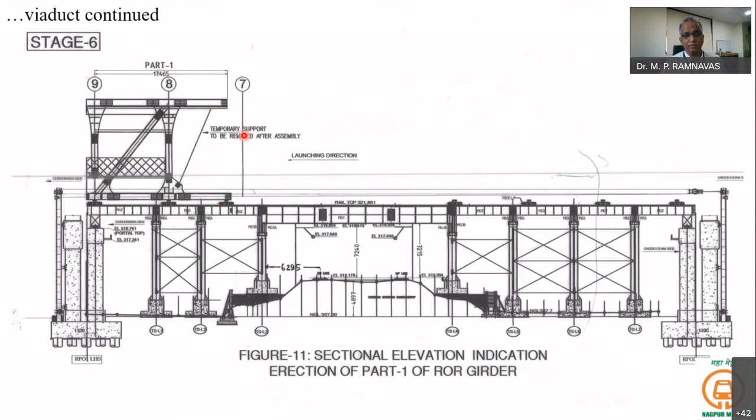After part 1, part 2, which was supposed to come here—if you see the node numbers, we have L1 to L9 for 8 panels. So nodes 7, 8, 9 were part 1, initially erected at the location where it is to be kept, but at a higher level.

This is because clearance is required for providing this temporary structure. So this was kept at 3.5 meters above the final position, which is yet to be lowered now.

After this was made, another 3-panel length, approximately 30 meters, was erected here: 30 meters length, 18.9 meters width, and 13 meters height.

So this is made here, and keeping it on Hillman rollers, through a pulling rope, this was pulled to this location, and later these were connected here.

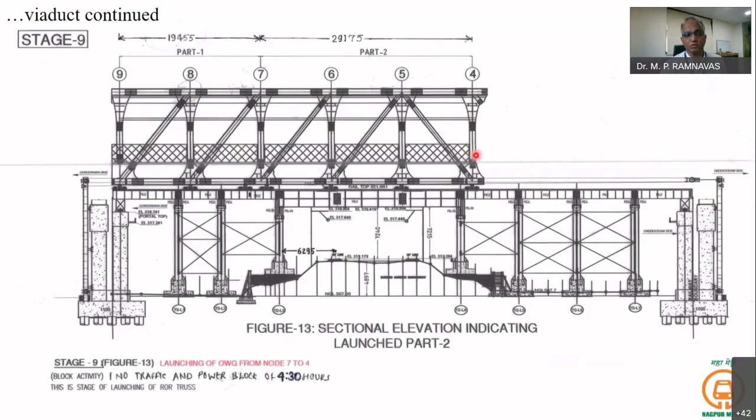So part 1 and part 2 were connected. After that, part 3, that is node numbers 1, 2, 3, connected to 4, member by member. So now this work is over.

After that, these girders are also removed—yesterday midnight, these girders were removed from the span through cranes. So now this girder is supported on four corners on temporary staging. It is to be lowered down now.

So totally 4 levels of the transport system—a 4-level transport system. Ultimately, this will become... our structure is catering to 2 levels of the transport system.

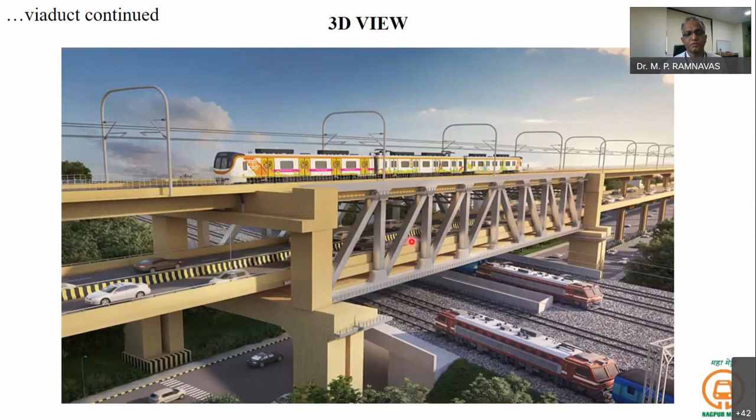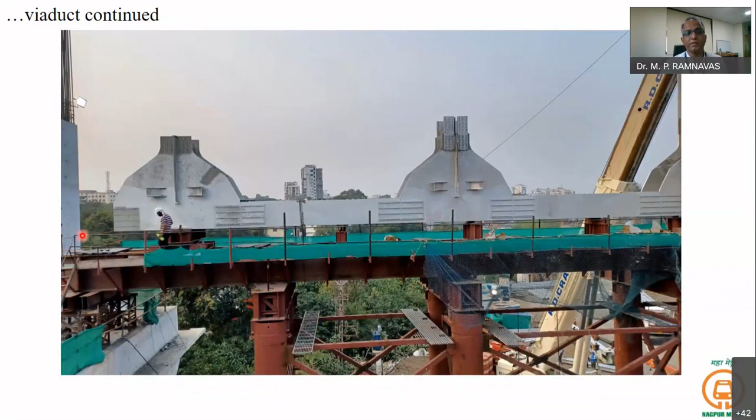After that, during deassembly, aluminum paint was applied, metallization, painting, etc. Then it was brought to the site, and there it was progressively erected. This is the lower chord, lower joint. This is how those things are, and this is the final truss, also completed.

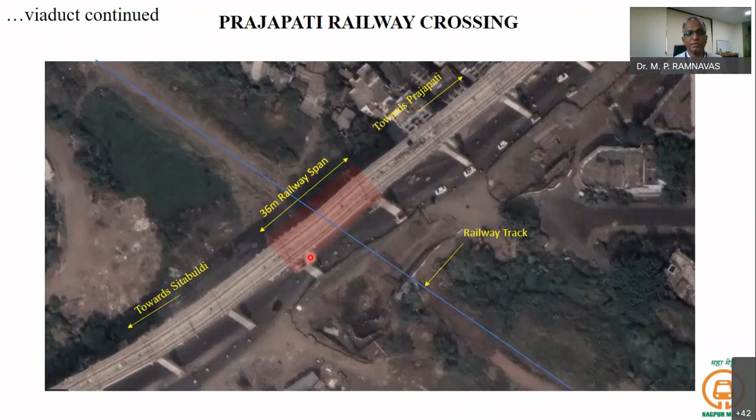Now we are having a Prajapati railway crossing—that is a simple structure with a 36-meter railway span. Railway track is there; we have 2 piers here connected with steel I-girders and a composite slab.

Here, due to the presence of utilities, we had to orient our foundation in a very unique way. This is available in almost all urban construction nowadays, because every time we dig, we get some surprise of having a utility which cannot be shifted. So we have to find an engineering solution for such situations. This is how the superstructure came out.

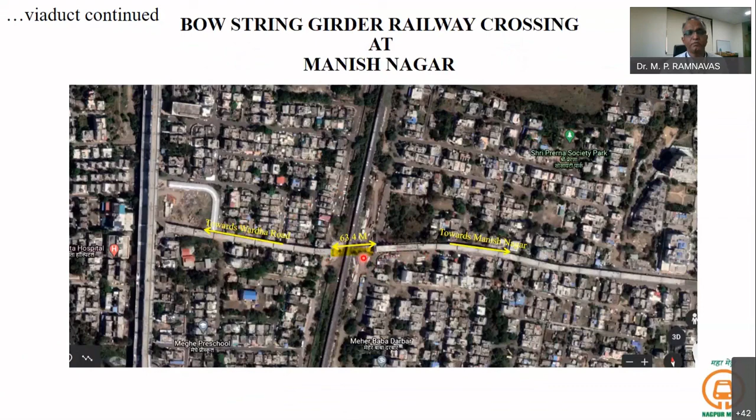Now we have a bow string girder for a railway crossing we constructed, a 63.4 meter bow string girder. This is the RDSO drawing we used. This is the completed work.

Another photo. And we have 2 depots—one is at Mihan, which, I think, everyone knows as the multimodal international cargo hub and airport of Nagpur, at the Nagpur depot. So we have a station near there called Kapri, and that area is called Mihan, so our depot is also called Mihan.

We have another depot at a place called Hingna. That depot has got some 21 acres of land here, and the other place also has 24 acres of land.

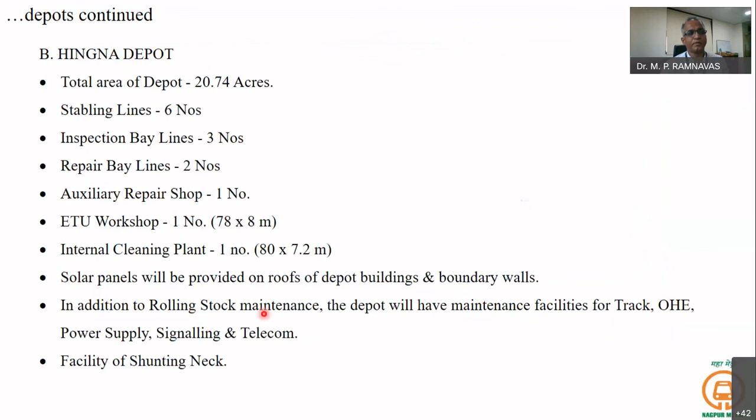Now we are nearing completion of our Phase 1 project, which is about 39 kilometers and 37 stations.

And we are expecting the extension of this project with Phase 2, of length 43.8 kilometers and another 32 stations, wherein our corridors will be extended to an industrial area called Butibori and the north side, Kanhan, like that. So this is the end of my presentation.